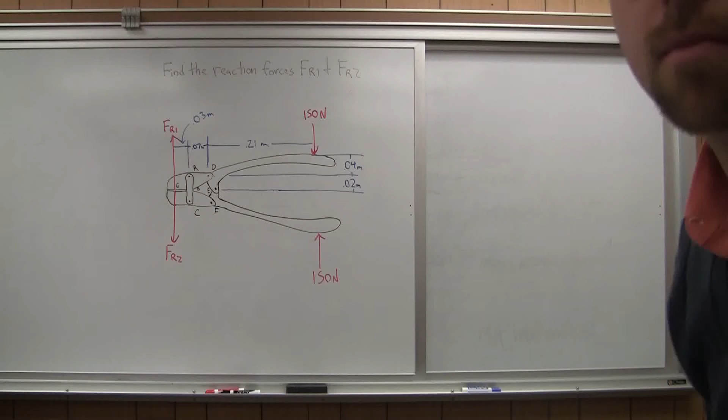Hello, for this problem we've got a pair of bolt cutters here, and we're asked to find the reaction forces FR1 and FR2. So FR1 and FR2 would be the forces that whatever we're cutting is exerting back on the bolt cutters, and essentially this will be the same thing as the cutting force of our bolt cutters.

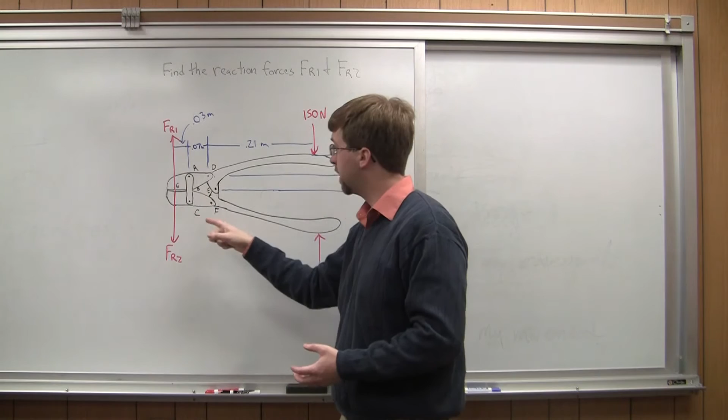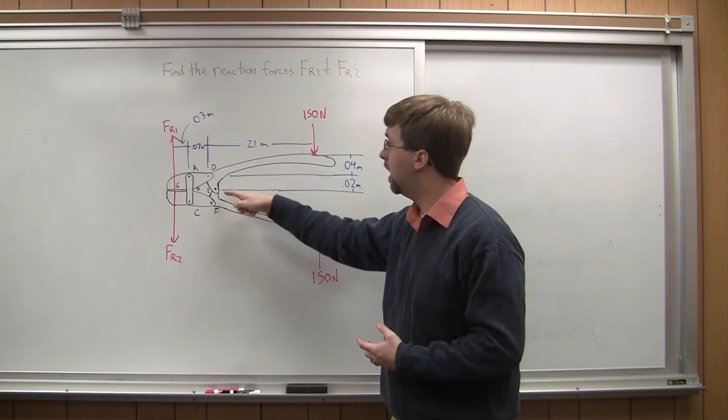So with our set of bolt cutters, we've got two blade pieces down here, the top blade and the bottom blade. They're connected. There's a hidden joint back here at point B. And then they're connected by a two-force member connecting points A and C. And then beyond that, we've got two handle pieces that extend out the back. They're connected to the blades and to each other in this center section right here.

So we've got a person exerting 150 newtons down like this. We've got a lot of the dimensions, and we're asked to find, we're going to have to go through this particular machine and determine those cutting forces at the end.

So since this thing is not internally rigid, we can't treat the whole thing as an extended body. We need to break it down into parts and analyze each of those parts independently.

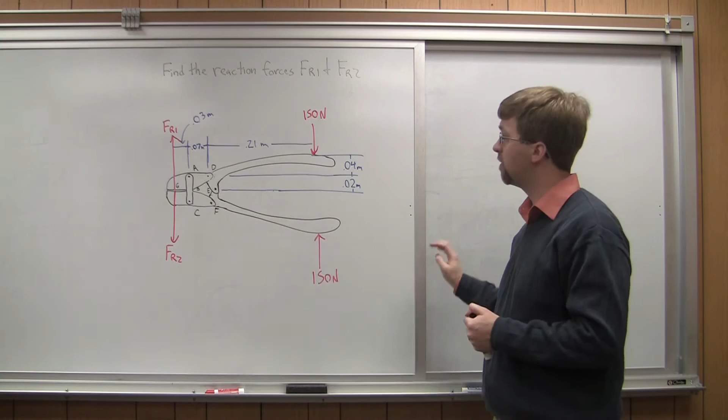So to start with, we know the forces on this end, so we're going to start with the handles. I've got handle DE and EF, and on this next board right here, I've drawn out kind of a more detailed view of each of those pieces.

So DE, we've got 0.21 meters or 21 centimeters from point D horizontally over to our 150 Newton force. We've got vertical distances between E and D of 0.02 and 0.04 to get to our 150 newtons right there. And then the angle, this is tilted back at a 20-degree angle between D and E.

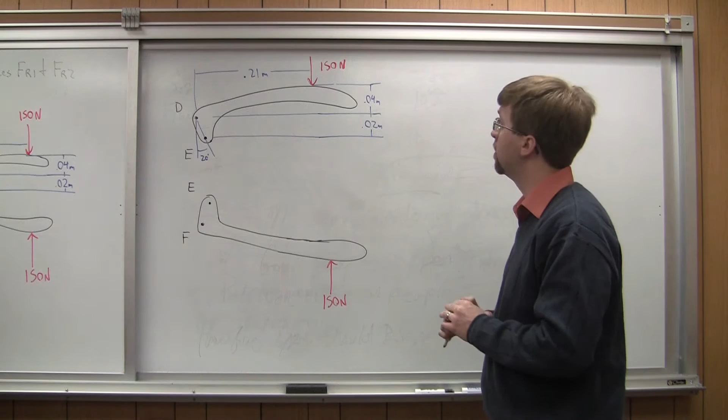So to do this, the first thing we need to do is draw in all of the unknown forces. So I've got one of the forces drawn in. I've got my 150 Newton force, and that's acting on the top part here. And I also have an X and a Y force at each one of my pin joints.

So I'm going to call this one Fdx, Fdy, and I've got the same thing at this pin joint here. I'm going to have Fex and Fey. Down here on the bottom, I'm going to do basically the same thing, but there's one important thing to remember, and that is that point E is shared between these two.

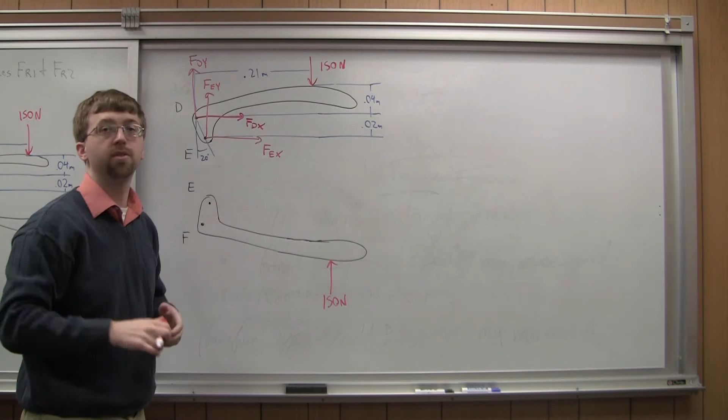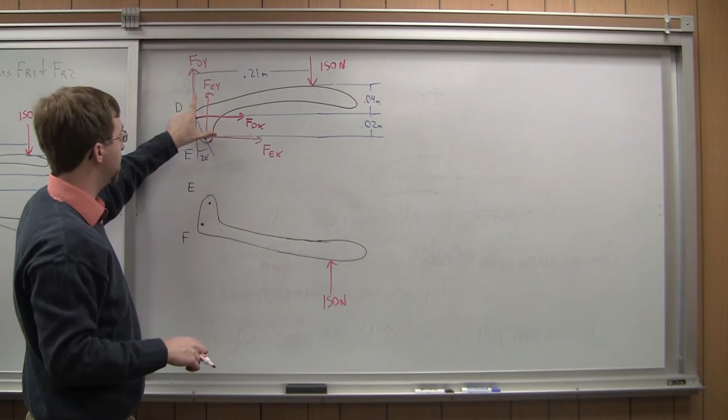So I've drawn Ex and Ey in kind of the positive directions here. I need to change that, I need to flip it, and when I draw it down here, I need to draw equal and opposite forces. So Ey is going to be going down, and Ex is going to be going to the left.

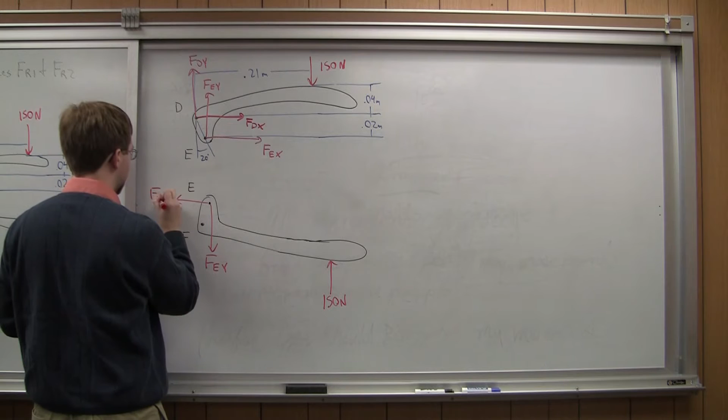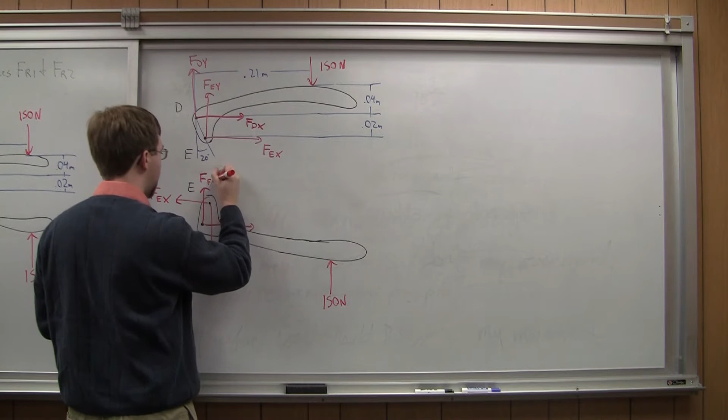Fx, I can just draw this one in the regular direction. So Ffy and Ffx over here. And so with that, I've got all of my forces drawn into my free body diagram. I can start drawing out my equilibrium equation.

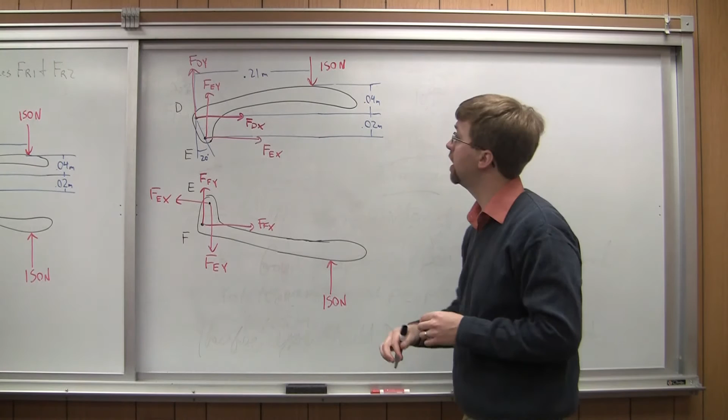So I'm going to start with the top member up here, so DE, and in the x direction, sum of forces in x is going to be equal to Fdx plus Fex equals 0. In the y direction, I'm going to have Fdy plus Fey minus 150 equals 0.

All right, and then I'm going to do sum of moments, and I need to choose a point. So the easiest point to choose right here is going to be point D, since everything is kind of measured from point D. So sum of moments about point D, that's going to give me three forces that are going to exert a moment. So first I'm going to look at Fex. Fex is going to exert a positive moment, and the distance, the perpendicular distance here is this 0.02 meters. So I'm going to have 0.02 times Fex, and that's a positive moment.

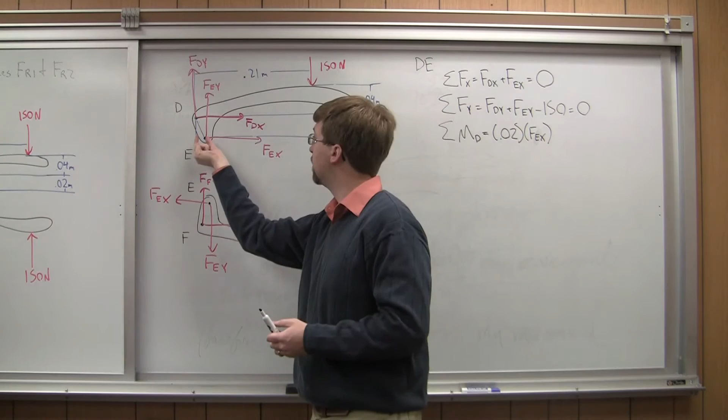Fey is also going to exert a positive moment. It's going to cause that counterclockwise rotation. And so the horizontal distance here, if I know my vertical distance is 0.02 and this is a 20-degree angle, I can use the tangent. So I'm going to do 0.02 times the tangent of 20 to find my horizontal distance there. So plus 0.02 times the tangent of 20 times Fey.

And then finally I've got my 150 Newton force. So this one's going to exert a negative moment. It would cause a clockwise rotation about point D. And my distance is that 0.21 meters. So minus 0.21 times 150. And so the sum of all those moments is going to be equal to 0.

Now I'm going to jump down, and the next thing I need to do is member EF, the bottom member down here. I haven't copied over a lot of the dimensions, but it's basically a mirror image of the top bar there.

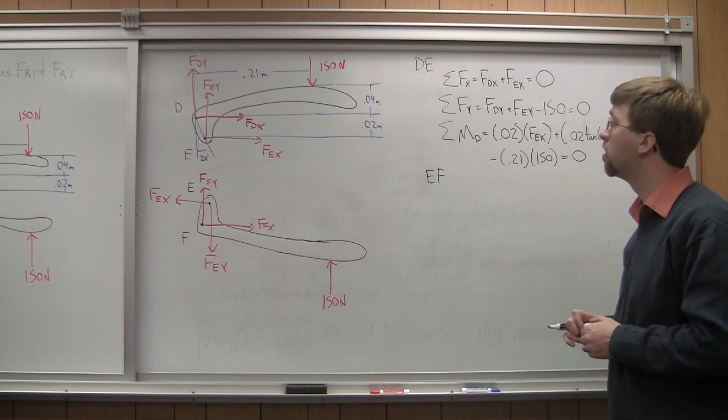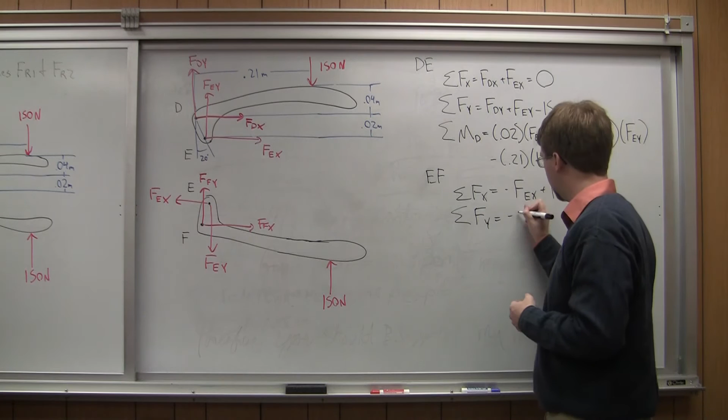So in this direction, sum of forces in x is going to be equal to negative Fex plus Ffx equals 0. Sum of forces in y, I'm going to have negative Fey, and I'm going to have positive Ffy. And I'm also going to have a positive 150 Newton force down here.

All right, and then finally sum of moments. In this case, I'm going to do sum of moments about point F. And I have very similar things to what I had up here. So sum of moments about F, I'm going to have Fex times 0.02, and that's going to cause counterclockwise rotation, so that's positive 0.02 Fex. The y direction, however, would cause clockwise rotation, so this is actually a negative moment this time.

So minus, and my distance again is the same thing I had up here, so 0.02 times the tangent of 20.

Times Fey. And my 150 Newton force, that one's going to cause a counterclockwise rotation, so that's a positive moment. So plus, and my distance is going to be 0.21 meters, just like on the top.

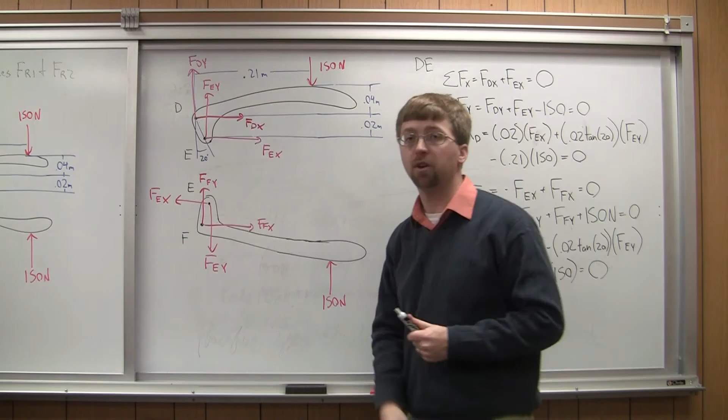All right, so now I've got the equilibrium equations. Before I couldn't solve either one of these independently, because I've got 4 unknowns, and I can only get 3 equations for each of these 2 bodies. But 2 of these unknowns, Fex and Fey, happen on both of them, so all through both of these, I've got 6 unknowns, and I've got 6 total equations here.

I won't go into the details of solving this, I'll just kind of skip to solving all this. I used matrix equations to go ahead and solve these equations. So I'm going to get f dx and f dy. F dx ends up being equal to 0. F dy is negative 4,177 newtons.

Fex ends up being equal to 0. Fey ends up being equal to 4,327. And Ffx is equal to 0, and Ffy is equal to positive 4,177 newtons.

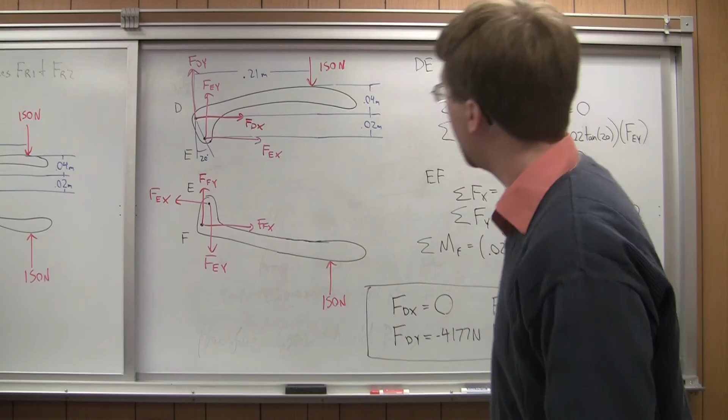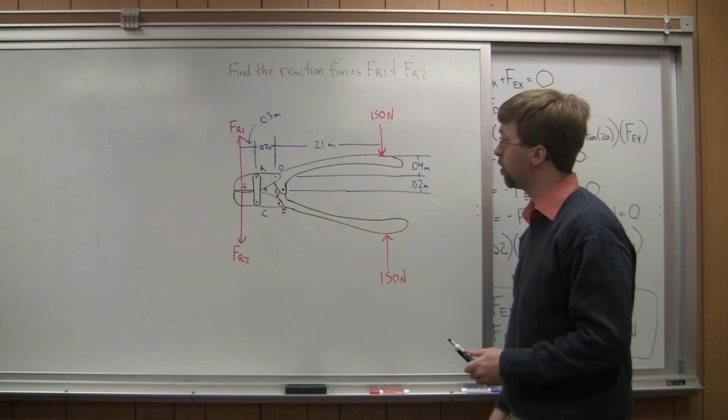All right, so down here are the forces that I'm going to look at. And the important ones, Fdy and Ffy, are going to be acting on the set of blades that we look at next. So let's go ahead and move on. Next, I'm moving from these two handle pieces in the back, and I'm going to look at the two blades and member AC that's connecting those two blades.

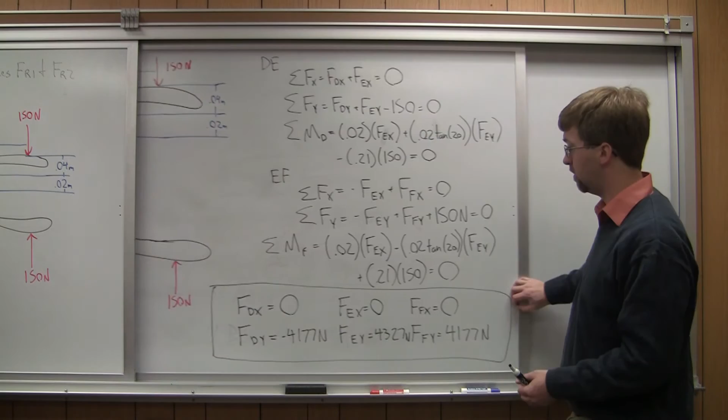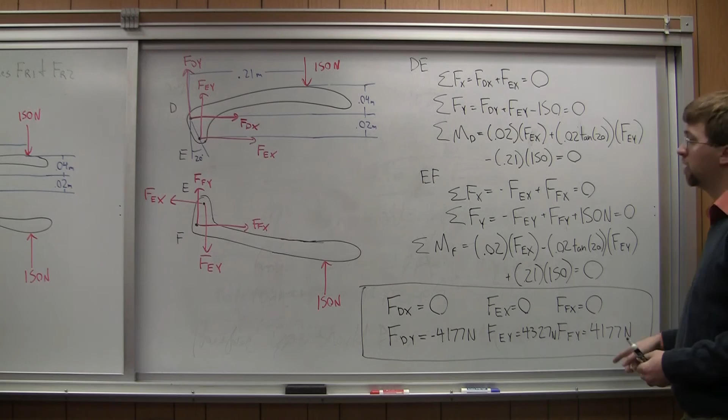So if I draw a free body diagram of those pieces, it'll wind up looking something like this. And so I found already the forces acting at D and F. Let's look back and see what those were. So the forces at D, in the x direction I had 0, same with F, I had 0 in the x direction. And I had negative 4,177 in Fdy, which means that this force was actually going down. And I've got positive 4,177 at Ffy, which means that this one was correct.

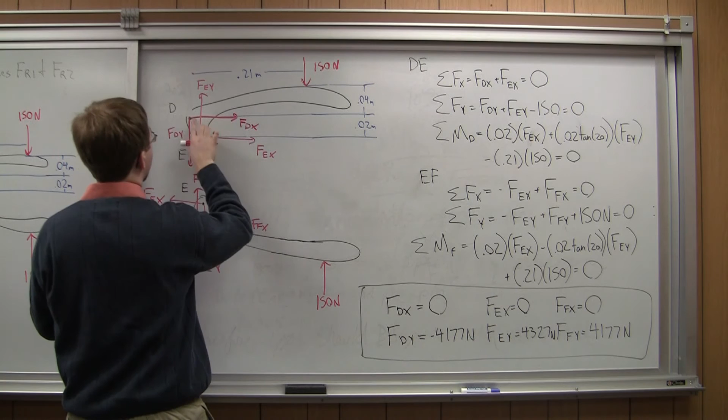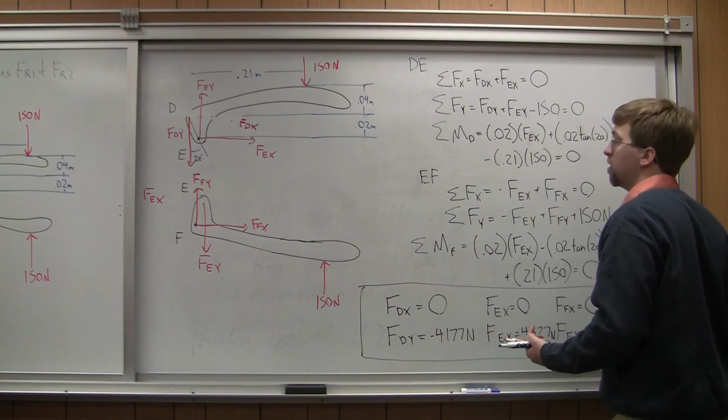This one is going up, but it's equal and opposite. So this one, let me redraw this in how it should be. So this one should have been going down. And the x direction basically doesn't exist, that disappears entirely. So these are pushing in, or being pulled in by the blade pieces, which means that on our blades, they're actually going out. So this is Fdy, which was 4,177, like so, and this was Ffy, which is 4,177 newtons, like that. And then the x direction had zeros.

So now I need to start drawing in all my unknown forces for this, and I'm looking to get to Fr1 and Fr2. So the first thing I can notice is that this piece right here is a two-force member, which means it's in tension or compression. I'm going to assume it is in tension. So I want to have Fc and Fa up here, which means that at this pin joint here and this pin joint here, I only have a force in the y direction. I don't have a force in the x direction because it's a two-force member.

At B, however, I can have Fbx, Fby, and Fby would be going down here. Remember always Newton's third law, they have to be equal and opposite. And I'd have to assume this one is going forward.

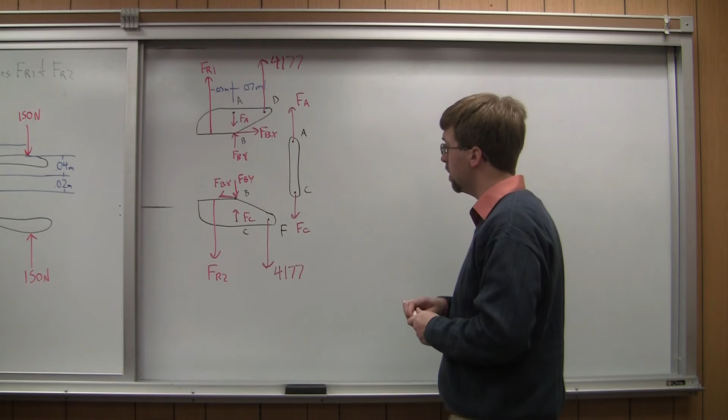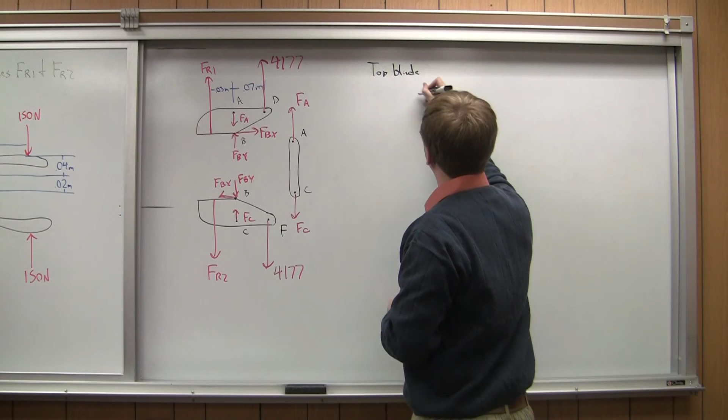So, again, we've got a lot of unknowns. We've got 3 different bodies, we can do a lot of different equations. But if we're careful, we can go ahead and figure out the reaction forces with one equation, and that particular equation is going to be the sum of moments. So if we look at this top blade, and I do the sum of moments about point B, I'll notice that Bx and By, they're at that point, so they don't exert a moment. Fa is going down through that point, it doesn't exert a moment. The only things that are going to exert a moment is this known force, 4,177 newtons, and my Fr1 force.

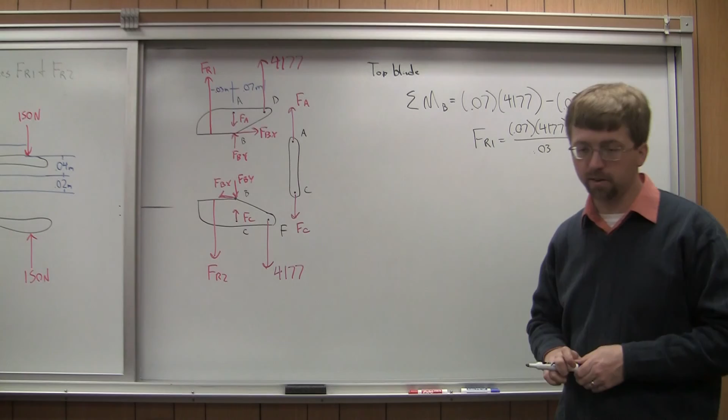So sum of moments about B, I'm going to have 0.07, this is a positive moment from the known force. So 0.07 times 4177 minus my Fr1 force, 0.03 times Fr1, in the negative z direction. So 0.03 times FR1 is equal to 0, and that is an equation I can solve for my FR1 value. So FR1 ends up being equal to 0.07 times 4177 over 0.03. And that gives me the final force, the cutting force from one blade will be equal to 9,746 newtons.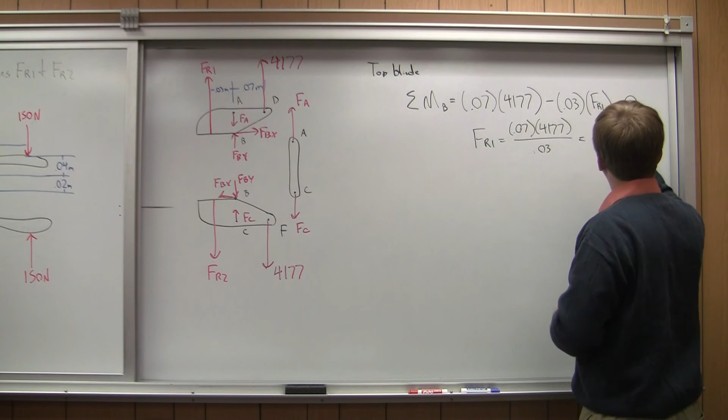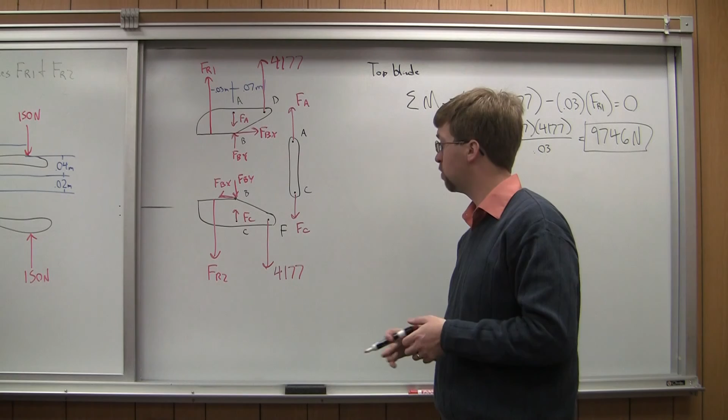All right, so with that, I've got one of the pieces, and if I look down at the bottom, I won't go through the whole thing again, but this is basically a mirror image. If I again do the sum of moments about B, I'm left with only two forces that are going to exert a moment, the known force 4177 and FR2. So FR2 also ends up being equal to 9,746 newtons.

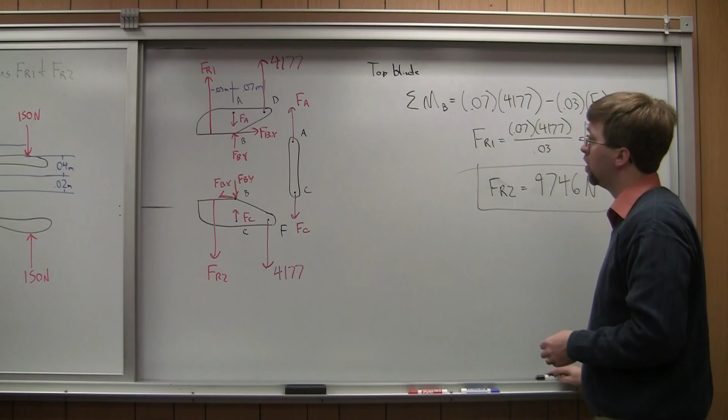So with that, we've gone through and we've gone from our input forces and we've figured out the FR1 and FR2, which is going to be the cutting force from the blade. So really the force that the bolt or whatever we're cutting with this is going to exert back on us.